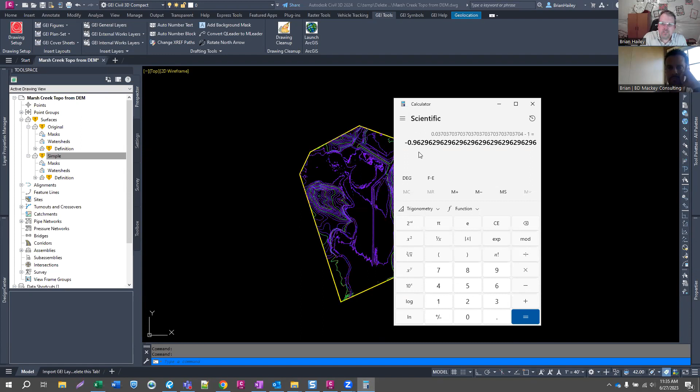So I went into the simplification. If you're not familiar with simplifying a surface, it's an edit. So if you come down to edits, right click on edits, there's an option to simplify the surface. I did the edge contraction, and then I did the entire surface.

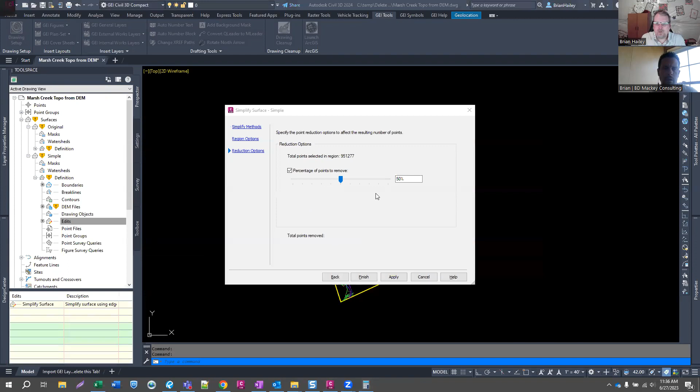And then I took this down to whatever that was, 96% or something like that, right? And I did that, and this new surface, when I go into the statistics, you can see how much faster this goes, is 952,000 points, which is small enough that it doesn't need the MMS file.

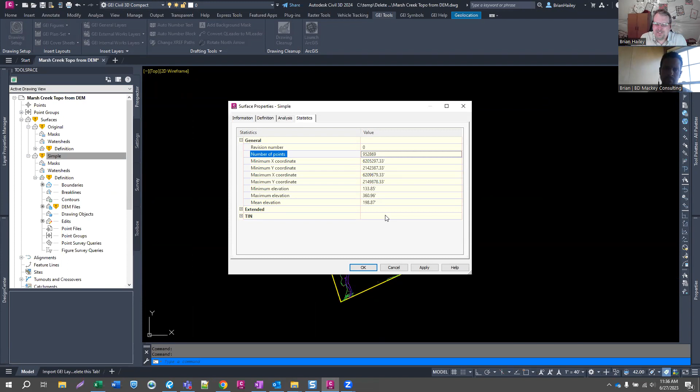I was like, that's great. But how much did we lose on this? And so what I did is I went in and I created a volume surface, and I did a volume calculation between these two surfaces, the original surface and the simplified surface.

Now, I do not recommend creating a volume surface between surfaces this large. In fact, I tried this many times to save it in the drawing, and every time I save it, I open it up, it says, hey, this drawing needs to be recovered. And when I open up the drawing, the volume surface is gone. It just does not like this much data, but it worked while I was in it. And so I did some analysis on this, and here's the information that I got.

All right, so the furthest off it was 1.4 feet in the positive direction and 1 foot in the negative direction, so above and below. And most likely those are way out there on the fringes, because you can see the area was less than a square foot on that. So I'm not worried about those. In fact, if I go within 1/10 of a foot, you can see practically 100% of the surface is within 1/10 of a foot of each other.

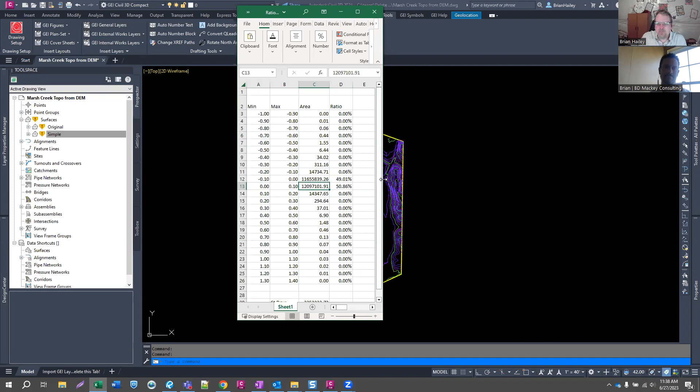So I was like, okay, this gives me a little bit more confidence in what I'm doing, because you add those two together, it works out to be like 99.8% or something like that, which is practically 100%, right? And then I said, okay, but 1/10 of a foot could still be significant. So I went even deeper. I went into 1/10 of a foot accuracy within 1/100th of a foot increments within 5/100ths. And here's what I got.

So as you can see, about 40% of the surface was within 100th of a foot. And almost, what's that, 97% of the surface was within 5/100ths of a foot. And I actually copied this over here, so you can see these are the totals here.

So 99.87% of the surface was within 1/10 of a foot. 97% was within 5/100ths of a foot. 93% was within 4/100ths of a foot. And so I feel pretty confident with this simplifying option, and it just makes the surface workable.

So if you're working with DEM files, my recommendation is to do this yourself, right? Don't take my word for it, because you want to make sure that what you're doing is working. But take this large DEM file that's millions and millions of points, simplify it so it's just below 1,000,000 points. And it's not 1,000,000 points; if you have 999,999, it's still going to write it. It's somewhere just below 1,000,000 points. I don't know what the exact number is.

Then you won't get that MMS file. So if you do it and you still get the MMS file, remove the simplify, do it again with an extra percentage taken out, right? And then you should be good to go. Okay, two follow-up questions to this.

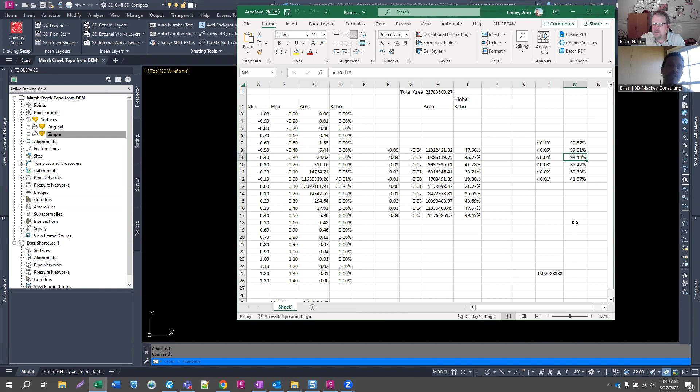John asks, what file format was the DEM in? This was a TIFF. So if I come in here, we'll go to this one. Take a look at the definition here. You can see that this was, let me browse for it, it was a TIFF file, so it was a GeoTIFF. I can't find it right now because I've got mapping issues, but that's beside the point. So yeah, it was just a TIFF file.

I don't know where the TIFF file came from. I was just told, hey, we need a surface from this. And so that's what I did. And I did put in a data clip boundary before I added the TIFF file. That brought it down from like 60 million points down to whatever it was we saw, right? 27 million points.

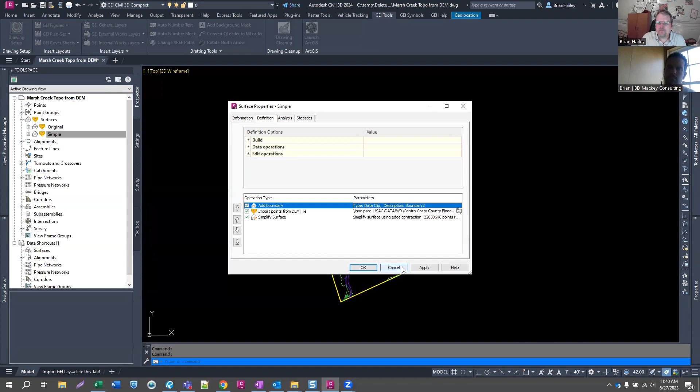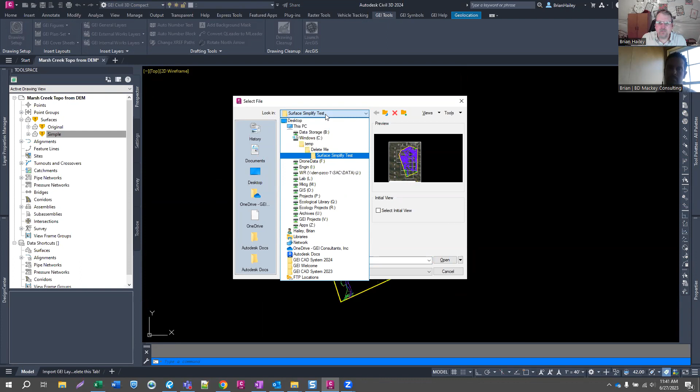We're going to follow it up with, how did you pull a spreadsheet of the data with the surface area ratio? I didn't pull the spreadsheet. I created the spreadsheet. And so let me open up a different drawing, something that I can actually do this with in a decent time. It took me hours to create that spreadsheet just to verify for myself. Let's see.

2024 Civil 3D, Civil Tutorials, Drawings. Let's see what would be a good one. Let's do the corridor one, because I know this has multiple surfaces in it.

So what I did is I created a volume surface, right? So I came up to the Analyze tab. Way to make this go away. Okay, move it. Yeah, there we go.

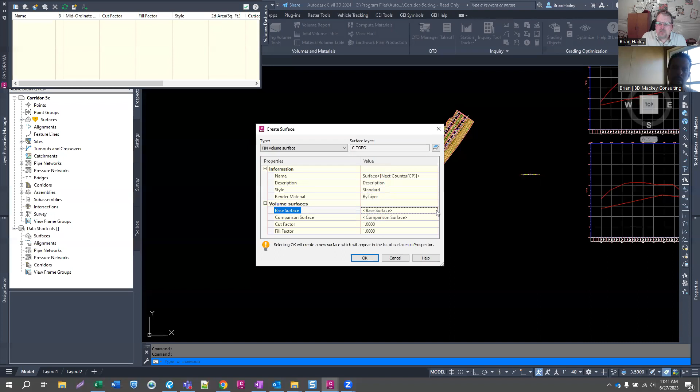All right, so I went over to the Analyze tab, I went to the Volumes dashboard, and I simply created a volume surface. And I used those two surfaces here; which order, in that case, it didn't really matter. But if you're doing volumes, typically you want your existing ground to be the base surface, and then whatever it is you're comparing against to be the comparison surface. So I'll just use a datum surface. Sure, why not?

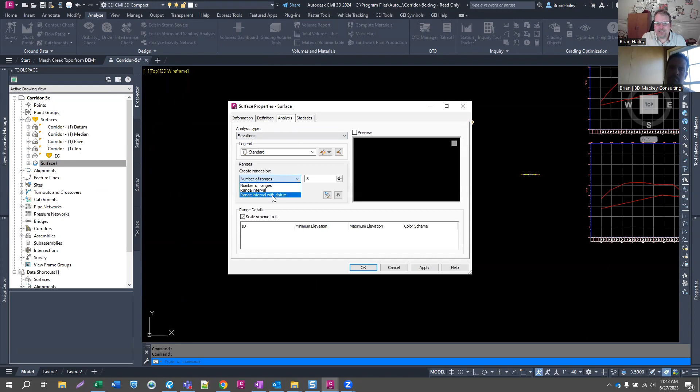And then I went into the surface properties of that volume surface. I went to the Analysis tab, and I did a range interval with datum. I said, hey, I want this to be at 1 foot intervals. I ran the interval, and it shows me. Wow, there's a lot of cut in this project. Let's make this a 5 foot interval. That's a little bit better.

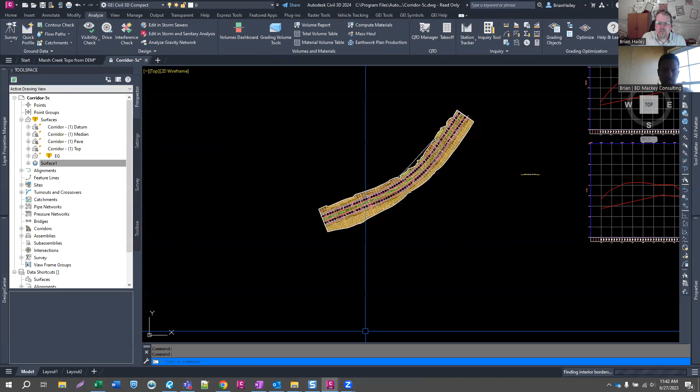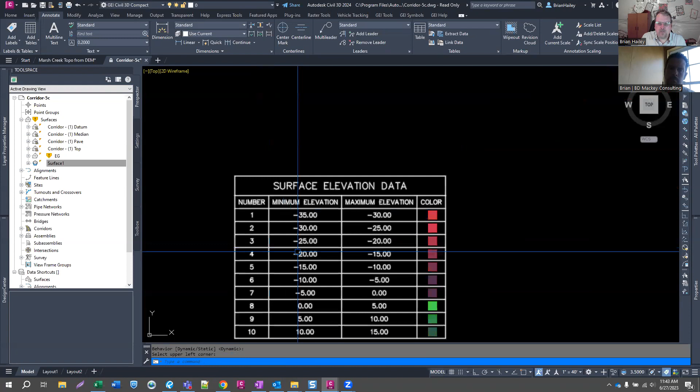And then I created a table. So I went to the Annotate tab, add tables, add surface legend table. I did it for that volume surface. I'm going to do an elevations table. I want it to be dynamic, and I'll just throw it in right there. Now the default table doesn't have area in it, so I just edited the table style. So I'll come down here and edit the table style.

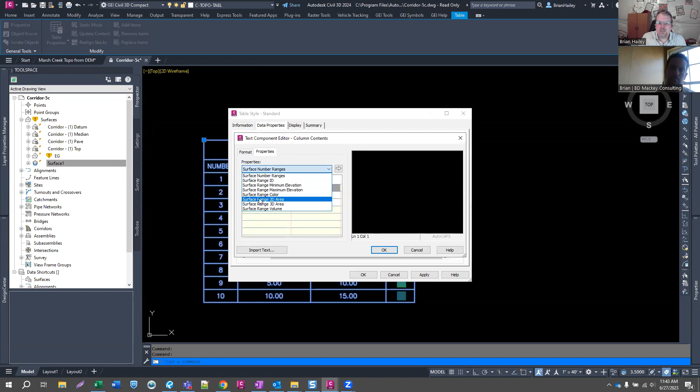On the data properties, these are the columns that are currently in the table. So I just added a new column to it. Gave it a header. In fact, I didn't even bother giving it a header, but you probably want to, maybe this would be area square feet. And then down here, if you double click in here, that's the data that's going to go into the column. And one of the options is the surface range 2D area. So I just added that in. And then okay. And then those are the areas for those ranges.

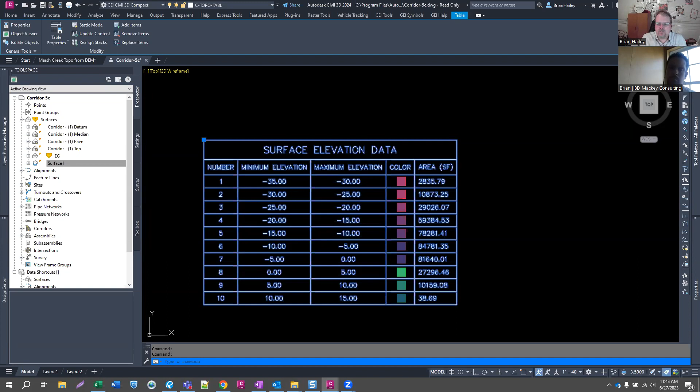And so using this sort of thing, this is how I got those areas out. And then I just manually copied this data into my Excel spreadsheet. Here's what I found. So there's no way to export that data to an Excel spreadsheet? Not that I'm aware of.

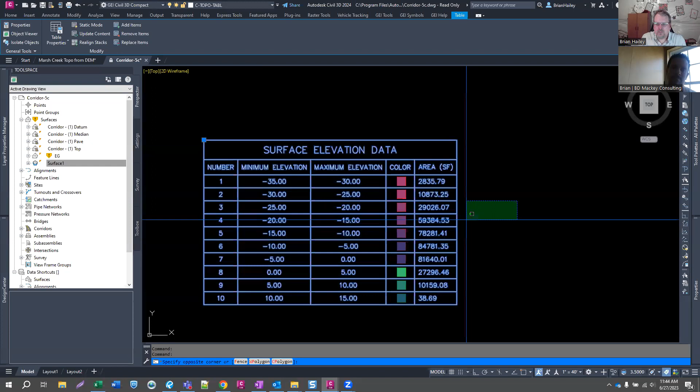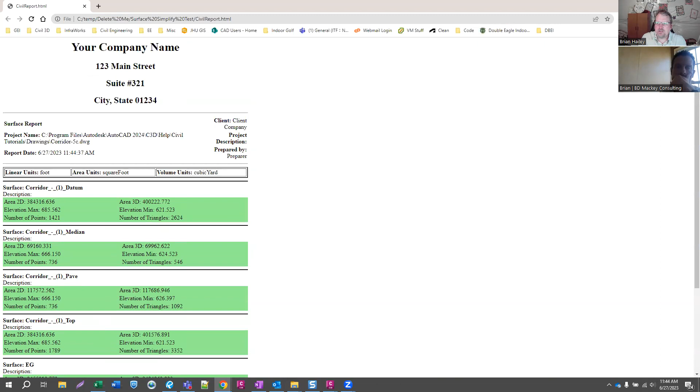There might be an option under... Okay, why'd you go away? It's auto saving. If I go to the Toolbox, Reports Manager, surface report, this might do it, but I don't think it will. Let's find out. Sure. It was giving you an HTML. Yeah. It is. Nope. Doesn't give you the breakdowns. Like I said, I don't think there's a way to do it. Yeah, out of the box at least. There might be a program that will do it.

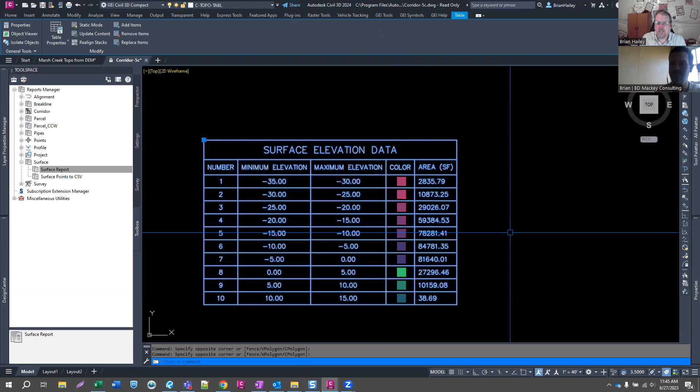So as he doesn't think there's a way to do it, Brandon asked, does table export work? That's where my brain was going, to some of the AutoCAD tools, just export tables. Oh, this is an AutoCAD table. Oh, I know. As far as I know, there's no export a Civil 3D table to Excel. That'd be really freaking nice though. I don't know why that's not an option.

Autodesk.wishlist.com. Right. I don't know what that actually is. Don't quote me on that page.

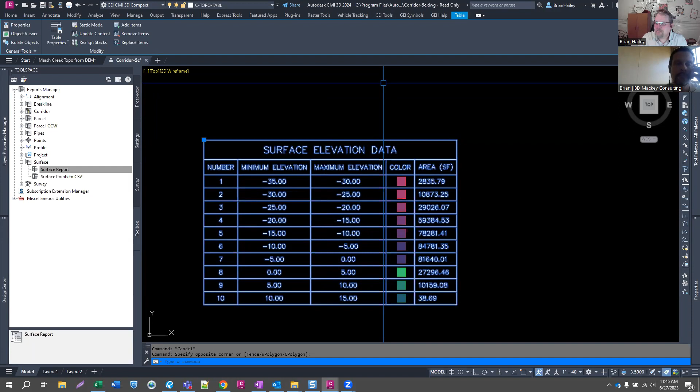And then Brian S also says he's been creating a Dynamo script to do this range interval with datum, and then uses assign colors to it. Oh, nice. Yeah, I would not try to run that on this because, for example, if I go into the surface properties here for this volume surface, I was actually doing it by number of ranges, and I was kind of manually doing this for a bit because just to click in this cell took like 5 minutes. Why? No clue. Super annoying, but just to be able to edit it took 5 minutes. So annoying.

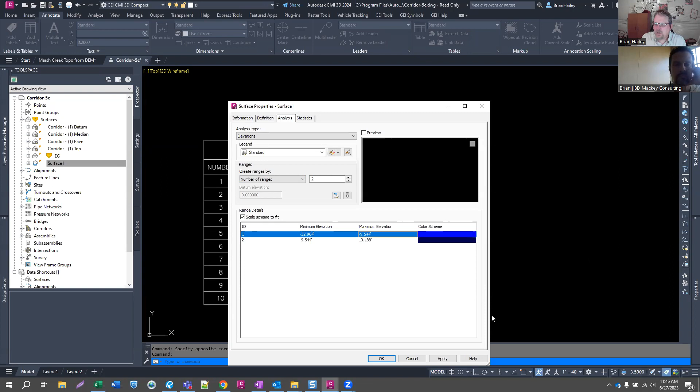And in the chat, people are saying, does Project Explorer tables export work? Ooh. Project Explorer tables export. I don't know. Carlos says, yep. Carlos says, yeep. I use it often.

I'm assuming Carlos has an accent, 'cause he types with one.

Where would I find the table in Project Explorer?

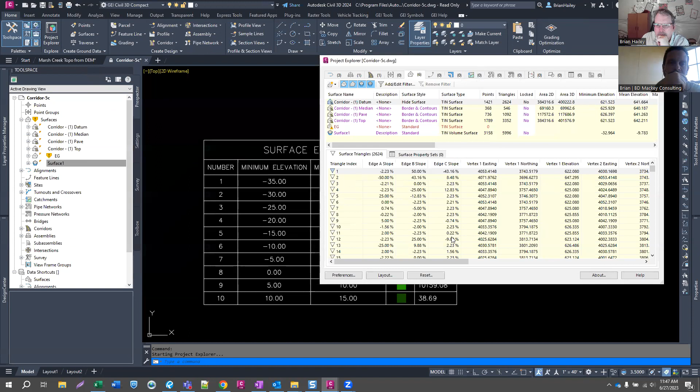I have no idea where to find the tables in Project Explorer. I mean, I have this table, but I don't care about that data. I want to get the elevation analysis table out. Anybody have any idea how to do that? Well, I think Carlos might have been saying he uses the app that Brian S put in the chat.

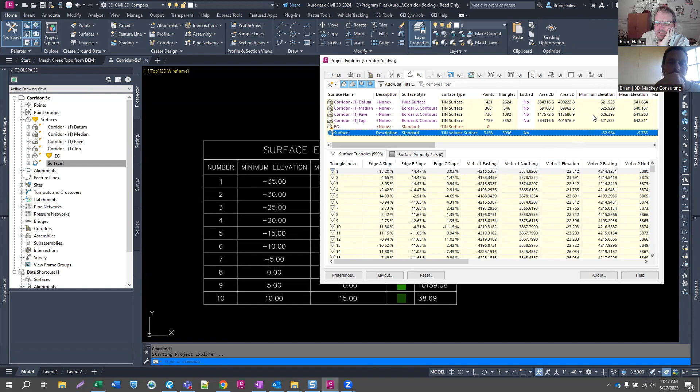No, there's no way to do it there, but there's an app to export your Civil 3D tables. Gotcha. Here's the app. Download that app. Take a look at the app. So Don Mayo says there is something in the wish list. It's been there for years, but nothing's happened. You're right.

There you go. How much is this? It's free. Check it out. Cool. Had you known this a week ago, you would have saved 2 hours on your project. No, not this project, because all the time was spent changing the data. Putting that data into Excel took a minute.

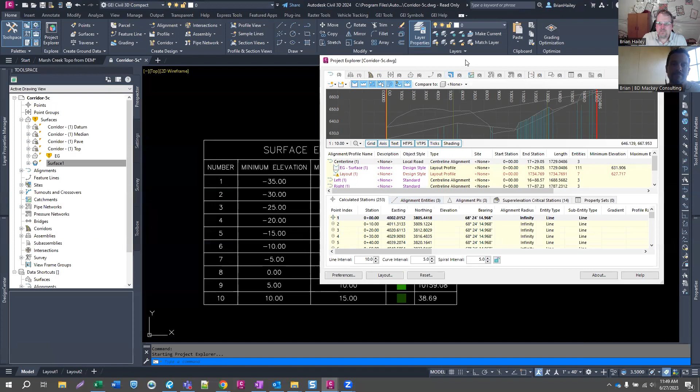Rebecca suggested in the chat that if you create a surface property set in PE, then you can create a report that you can export. Right, but will that display the elevations? I don't know of a way to get that elevation information into property sets. Yeah, Brian's agreeing with me. I don't think there's a way to do it. I would love to be shown to be wrong.

I love finding out that I'm wrong. So if I'm ever wrong, just call me on it, please. Because if I find out that I'm wrong, then I can stop being wrong. And that's kind of my goal in life. I'm gonna take that snippet of this recording and send it to your wife, so she can prove you wrong at any point in time. And also your children.

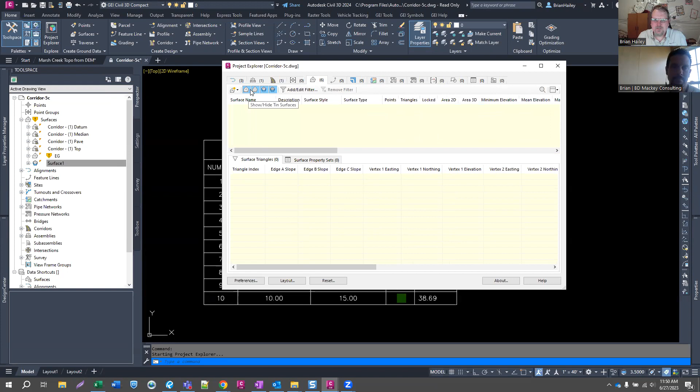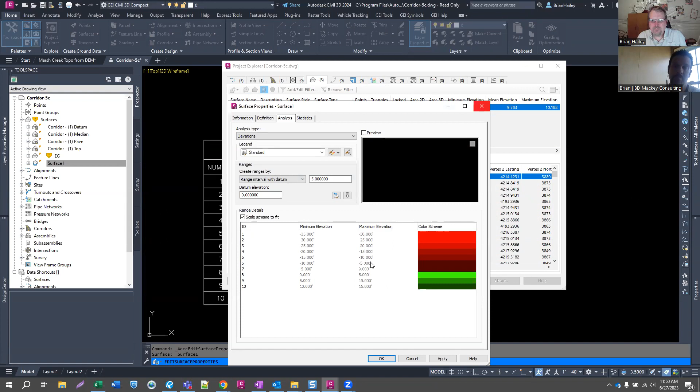Rick is also saying that in the Project Explorer, you can compare two surfaces. I just don't know if that gives you the elevations. Compare two surfaces? How do you compare two surfaces? All right, Rick, you commented, we're putting you on the spot. There's my volume surface. See, it's this that I want to export out. It's down here, with the area. So.

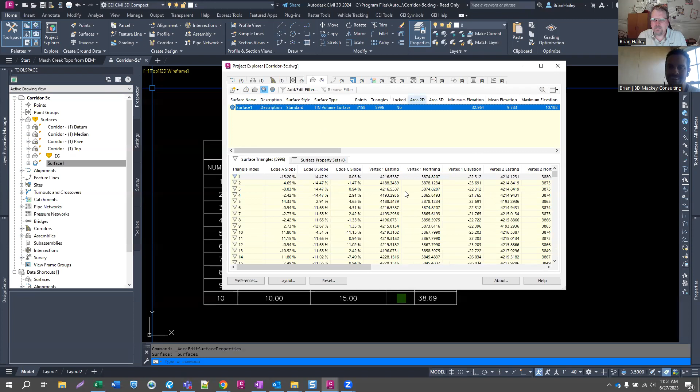Yeah, Project Explorer is great. Definitely recommend it. I don't use it enough because it's new and I'm old. But yeah, it's there. You definitely should be using this. All right. Have we beat that horse to death yet? Everybody said, yeah, you can get points on the surface, but they're not sure about the area or the comparison. Okay. And 2 new questions came up during that process.

So Sean asks, I am using Civil 3D 2021. When I have several CAD drawings open, there is a delay or lag time when I make a command. The command shows up in one of the open drawings that I didn't intend to use. I have to get out of the drawing, come back to it again. It's really irritating. Is this a bug in the 2021 version?

I don't know. The only time I've ever seen a lag in Civil 3D is if you have your properties open. Don Mayo is saying, yes, it is a bug, all the time. Okay. So I'm assuming John has seen this as well.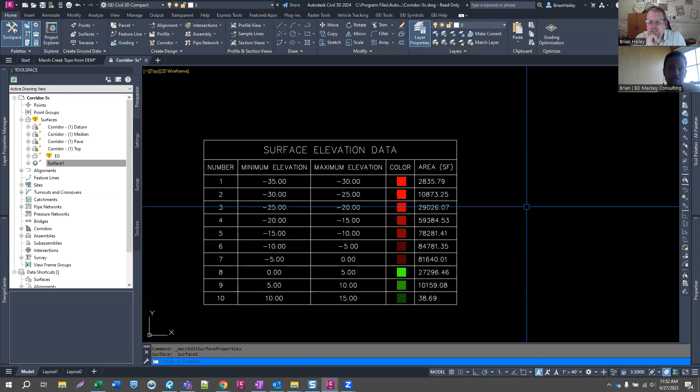And Chris says turning off the level of detail can help with the command line issue. I'll have to pay attention to see if it happens with the level of detail on. So if you're not familiar with level of detail,

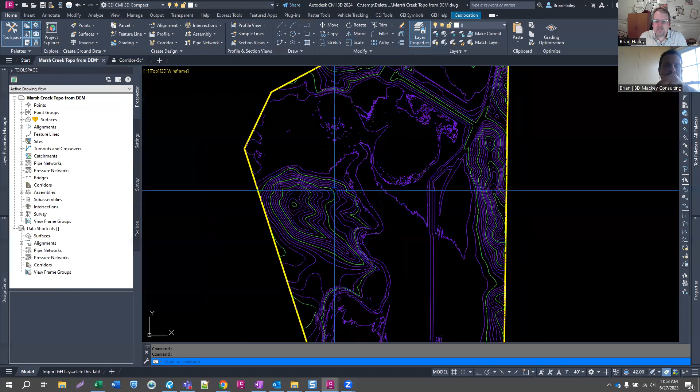so actually, I did want to show this. So I've got, this is one of the surfaces. I think this is the original surface. But I went in and I extracted the major contours from the other surface just to compare them. And so if I zoom in here, you can see this red line. That's just a polyline, right? And then you can see how close it is to my contour. So it's really ridiculously close.

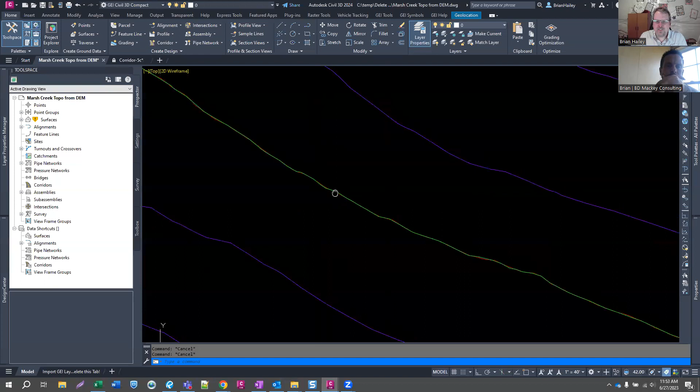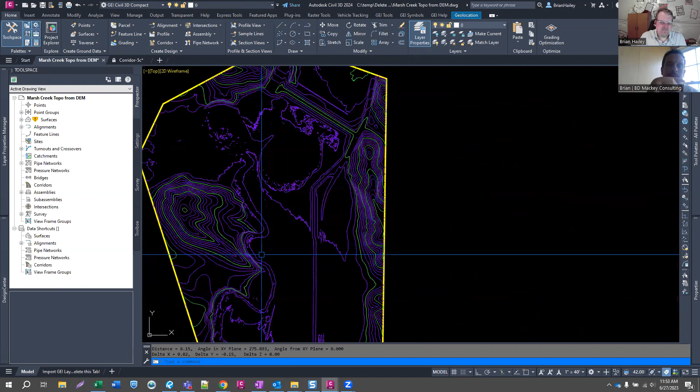So I would have absolutely no problem using this simplified surface for design instead of the original surface. As you can see, what is that distance there? It's less than 0.2 of a foot off. It's not like I'm using this to redesign an outlet structure for a pond, right?

If I was doing that, then yeah, maybe it would be important. But this is a stream restoration project. I've got this stream running through here, and we're going to be doing some bank stabilization on it. There's no need for that huge surface for this kind of problem.

By the time you actually go through all the jurisdictional corrections and all the people protesting, you're working on a stream, it's going to be 4 years later when the project happens, it will have eroded that far by then anyway. Yeah, that's another valid point. This stream is morphologically changing all the time.

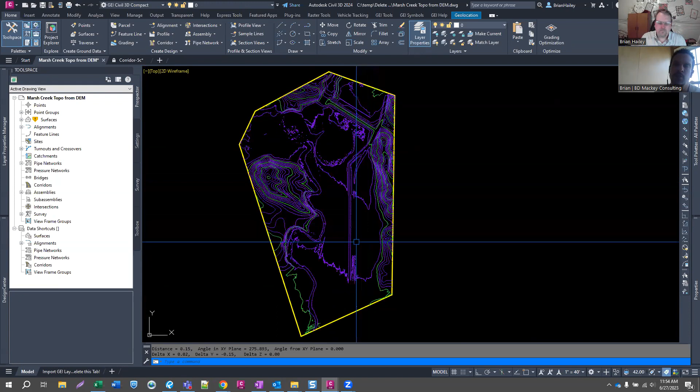So to answer Sean's question, is that a bug in 21? Sounds like it is. People said yes, it is, but then Danny had a follow up: it is still a bug in 23.2. So it's not just a problem in 21, Sean. Danny was saying he still sees it in 23.2. But I was going to come back to that level of detail.

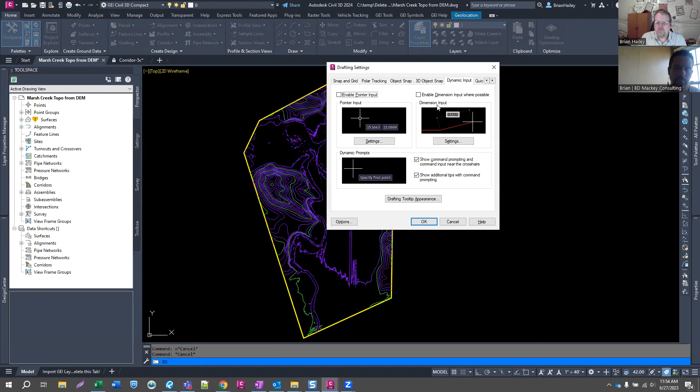So if I turn level of detail on, I just type level of detail. So this is 2024, I'm actually just in the process of setting up 2024. Currently my enable dimensions were turned off, and my dynamic input is turned off. Why is my dynamic input turned off? Come on. Pointer input. There we go. Okay, so level of detail.

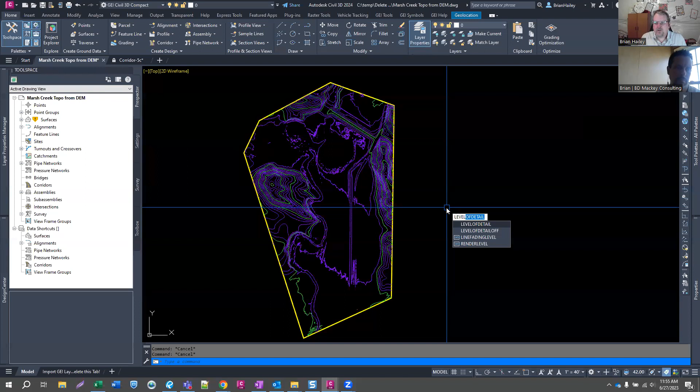All right, so I'm going to turn level of detail on. Basically what that does is it says, hey, I'm not going to display everything. And this one's actually not doing anything. But it'll only show you what you need for the surface. Maybe it's because this is a simple surface. I'm currently displaying 10 and 50 contours. So if I change this to say 1 and 5 contours here.

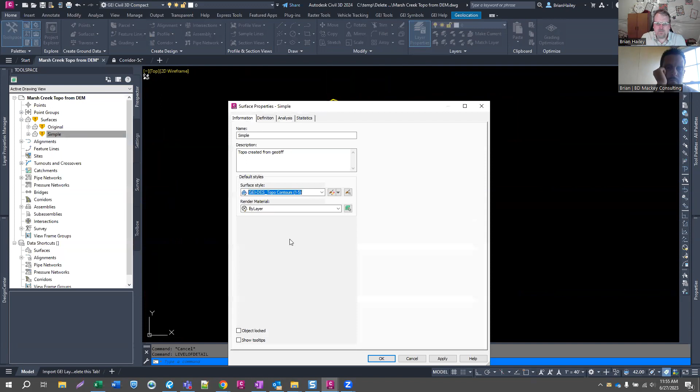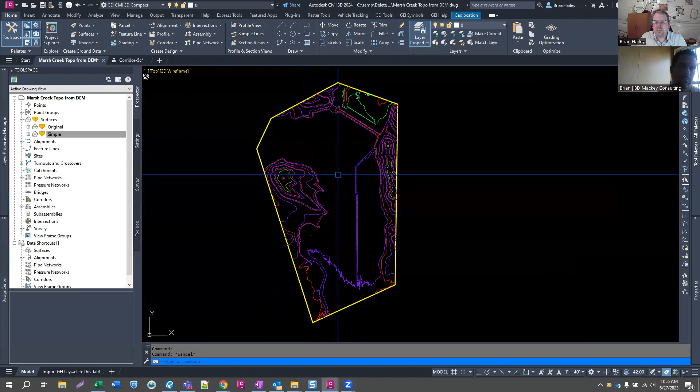You can see as I zoom in, I get more detail. As I zoom out, I see fewer contours. So that's level of detail. That's what they were referring to when somebody said maybe the level of detail was turned on that was causing that. You'll know that the level of detail is on in your drawing if you see this little symbol up here in the top left of your drawing area. That little symbol is your way to know that the level of detail is on.

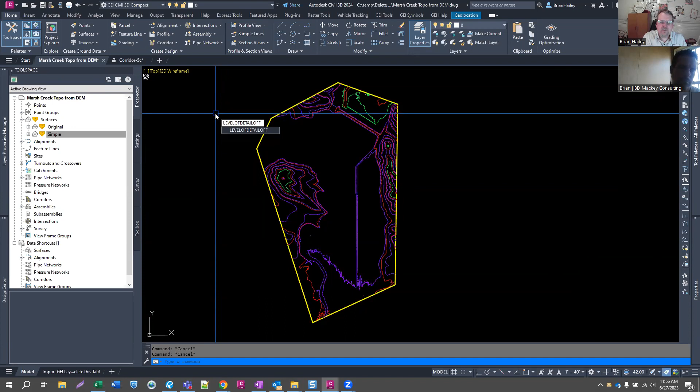Now, why this symbol is being used and how you would know that that's what it is, I have no clue, but that's what it is. So level of detail off is the command to turn it off. Now I'll just do a regen, and there we go, back to displaying all the contours. Okay, cool. What else have we got?

Brian S said, since you're in 2024, you should put the enable multi-thread, I'm assuming this is a system variable, set to on. Enable DS multi-thread. There it is. You missed a B. Enable, there we go. Simultaneous multi-thread, I'm guessing is what that is.

So let's see, turn F1 on there for that, see what this is, and it's nothing. All right, to control whether multi-thread is enabled while setting the working folder for the data shortcuts, fix the issue. Okay, cool. So there we go.

And then Tom was going back to the export thing. He said that you can go back to your volume surface analysis tab, select all and copy paste into Excel. Yeah, but that doesn't give me my areas. Just telling you what Tom said.

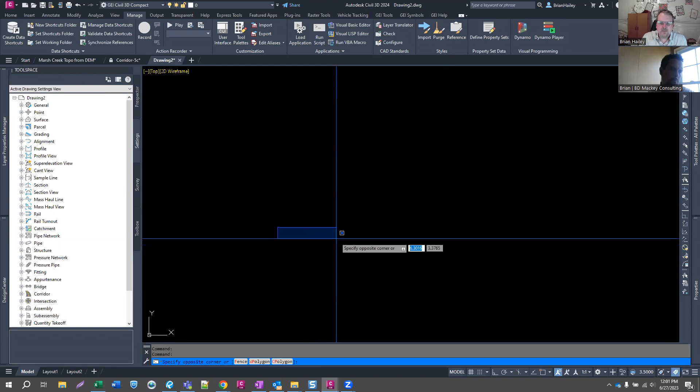Now that template is referenced in, if I come over to surface styles, you can see I get all those styles from the template. The nice thing about doing it this way is if you need to make a change to one of these styles for the project, rather than going into each drawing and changing it, you can change it once here in the reference template, and that will propagate through all of your drawings.

Just like changing an XREF propagates through all the drawings it's referenced in, changing the template will change all the drawings it's referenced into as well - but this is more for styles, settings, layers, etc. Now if I want to make a change to one of these, I'll right click and choose edit, and say I want to see the border for this one. I'll hit OK.

It's going to say wait - you're trying to edit a style that came from a reference template, what do you want to do? There are three options. One, I'm just going to cancel out of this.

Two, I'm going to make a local copy - oops, I didn't mean to click on it, I'll turn that one off. I can make a local copy of the style with a unique name, and that's what I accidentally clicked on, so you can see it created a local copy of it.

Or I can apply the edits for this drawing session only - I just want to see it temporarily, and once I close the drawing and reopen it, it's going to go back to the way it was in the reference template. So that's the idea behind reference templates.

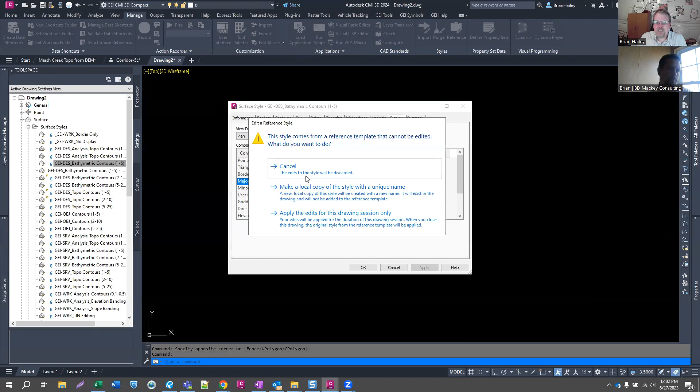If I then go in and detach that reference template, I don't remember what happens to the styles - I think they all get promoted. So let's detach that reference template.

And refresh this... did I not delete it? Is it not going away?

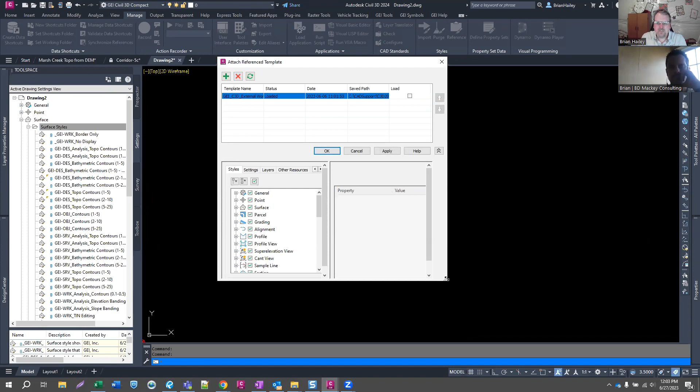Oh, there's the OK button. I was hitting the X instead of hitting OK. That was my bad, I was looking for it at the very bottom instead of in the middle. You can see all those styles go away except for the ones currently being used, and those were used because of settings brought in from the reference template.

So that's kind of the way reference templates work. How would you go about setting one up? I don't think there's really anything to do.

I would not set up a reference template for the company. I would not say every drawing is going to reference the company reference template. I think that's a bad idea, because CAD standards are never set in stone, things are constantly changed. If this particular setting in this style really sucks and I want to change it, that's going to change for every drawing that's out there. If somebody's in the middle of publishing a sheet set when I make that change, it could affect things, and I don't like that idea.

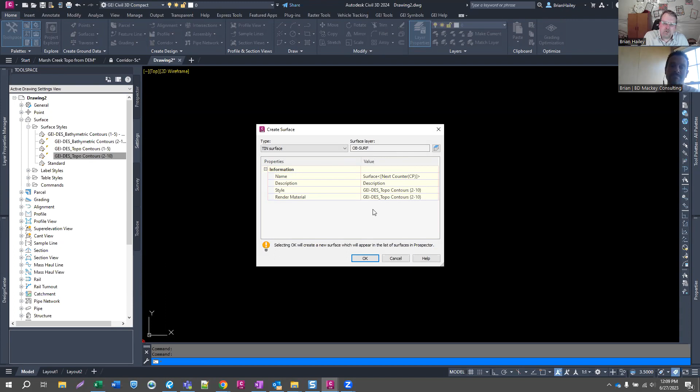So for example, let me do that. If I go create a surface, the default style is this style here, and so that style is being used by the settings. So it's non-purgeable, which is just what drives us crazy, because that style...

But you don't then want it as a Civil 3D drawing, you want an AutoCAD drawing. So we should be exporting these out to AutoCAD and then purging the snot out of that drawing instead of purging the Civil 3D drawing. Agreed.

Then Chris brought up a comment saying for our civil projects, we place the current template in a standards folder for that project and use that template to create all new drawings for that project. Reference templates are an alternate workflow which are attached per project if desired.

Cool. And then the problem with having a template per project is it makes it so that I can't use the quick new options. If I come up here and just hit this plus, it's going to start a new drawing using the default template. And if that template is different than the project template, then I have to be aware of that sort of thing. So I can't set this button up to create a template based, I suppose.

Well, I was just looking at this, so maybe y'all have an idea of what this is, because I never really paid attention to this. What is this project files search path? Perhaps that could help with that.

This is for missing XREFs, but I have no idea when it would be used on a project. From what I understand is for, hey, we have multiple people working on this drawing and their drives are mapped differently, or something along those lines, but I don't know.

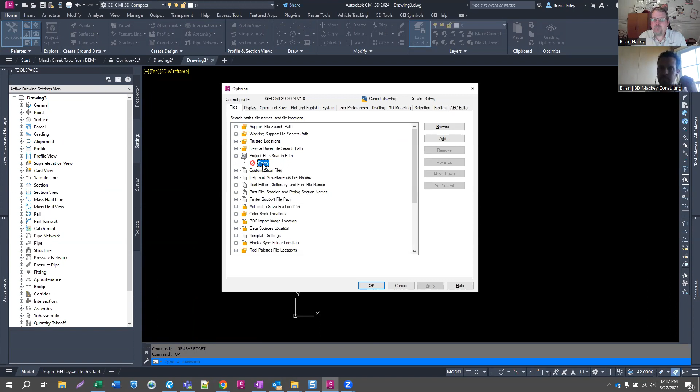Right, so that's back to this project search path. From what I understand, you would add a project. So I would call this one, I don't know, Brian. I've never actually done this, this is the first time I've ever done this. And then you could add paths and browse to someplace. And then in the drawing itself, you could do project name, I think is what it was, and then you would call this one Brian.

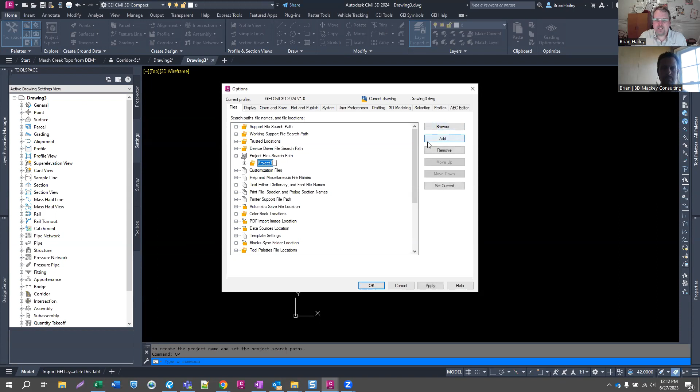And then it would look for that Brian, and I canceled out of that. I should have left that in there. All right, under the project name. All right, so add Brian. And then it would look in the paths that I add underneath Brian for the XREFs for the Brian project. And that's my understanding of how it works. But like I said, I haven't played around with it. As a company-wide CAD manager, I don't see me setting this for a project at all. I think this would have to be very project specific. So.

Yeah, it looks clunky, Brian. Just use relative paths for your XREFs. Just use relative path. Is this old or is this new? Because I've never actually noticed this before. And I think maybe I've just kind of glanced over it all the time. It's been there a while. Yeah, a long while. Yeah. I just have never paid any attention to it till just today. So.

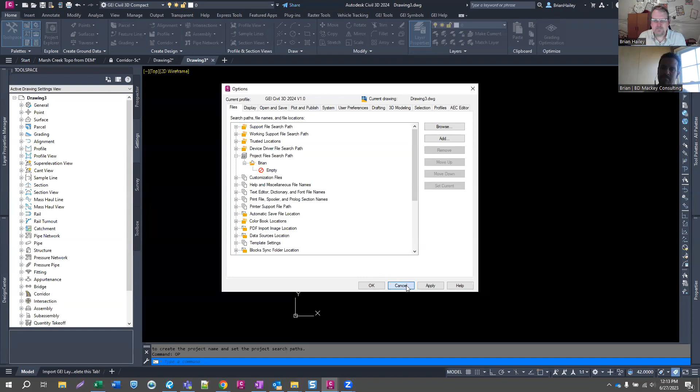All right, we got anything else, Brian? Question from Joel here. It says, have you done anything with InfoDrainage and moving data back and forth from Civil 3D? Yeah, I don't have any of the new stuff that came over with the acquisition of whatever that company was. I can't think of it off the top of my head, where InfoDrainage comes from. I don't have any of that software, so no, I haven't done anything with that yet. So I have nothing to add on that particular topic, unfortunately. I'd love to get into it, but I just don't have access to it. My understanding is it's fairly pricey. Innovyze. Thank you, Justin. Innovyze is the company I was thinking of. But I haven't looked into it yet. So

Yeah, John, my understanding is you still have to pay for the Innovyze tools. Autodesk has to make some money off of their $1 billion acquisition. It was only $1 billion. That's my understanding. What do you mean, John? It'll go nowhere. Come on, they've done so much with like the Storm and Sanitary Analysis and the Hydraflow. Okay, never mind. You're probably right. Yeah. Sorry, Joel. No answer for you on that one. Yeah, sorry about that.

Brian's like, hey, let's all get together and start a next gen stormwater analysis company, then let Autodesk buy us. So I was looking at the Hydraflow stuff, and that was purchased from a guy whose first name was Chris, I think. I don't remember what his last name was. Autodesk bought that software from him, and I was looking at it, like, it'd be really nice if they updated this, and are there options out there? So I went out there and I was looking, and that same guy basically redeveloped that same program, but with updates, better than what Autodesk has. Funny. Oh, that's funny. Sometimes that stuff amazes me.

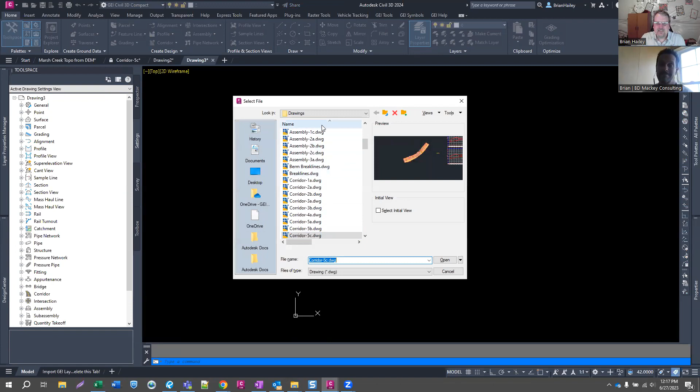Yeah, I can do that. Let's see. We'll open up all these drawings here. They're all read only, so it's going to have to ask me for each one. These are just a bunch of the tutorial drawings. So they're not big drawings, but I can open up a lot of them.

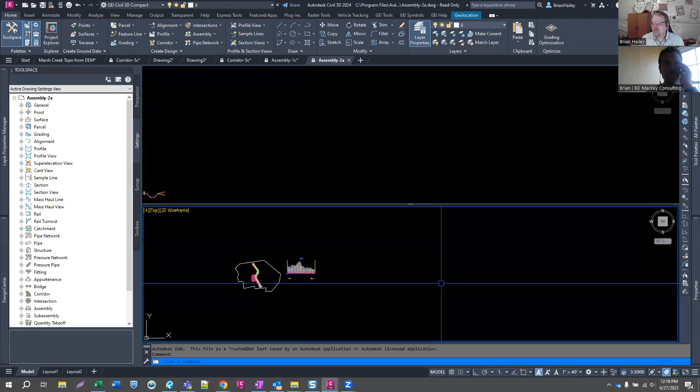Sure to play with the level of detail while testing as well. That's true. That's true. And level of detail is a system setting, not a drawing setting, if I remember correctly. I hope so, because otherwise that's a lot of drawings you've got to turn this on.

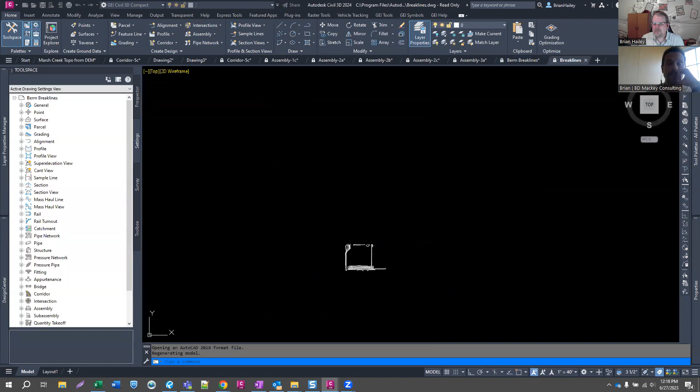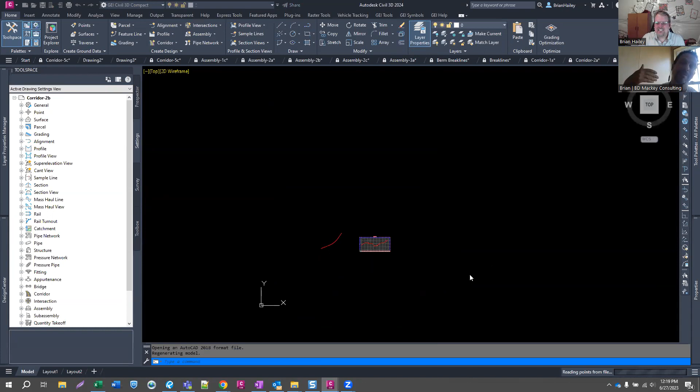See, I just want to point out that if more questions had been asked, we don't have to sit here and wait for 5 minutes and watch Brian open up an excessive amount of drawings. We could be actually answering real questions. No offense, Sean, but I did save this to be the last comment, even though it did come up a long time ago. Yeah, I shouldn't have opened that many. That's okay. We have no questions, so this is perfect.

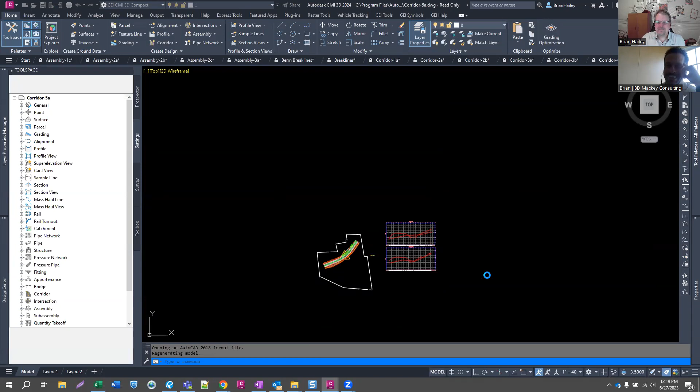So how's the weather down there in Holden Beach? It was crazy, like rain and wind last night. Like there was over an inch of rain in like an hour. Wow. Blew everything all over the place.

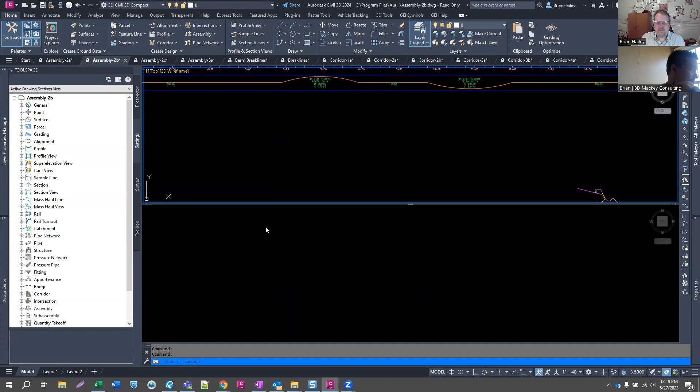Went crazy. Yeah, I'm not seeing any delay switching between these. And Tom says it's quite likely a command didn't quite finish before people switched drawings. All right, so can you turn on the level of detail, and can you do some sort of long command and then try switching drawings while it's still trying to process that command? That's what Tom thinks it is.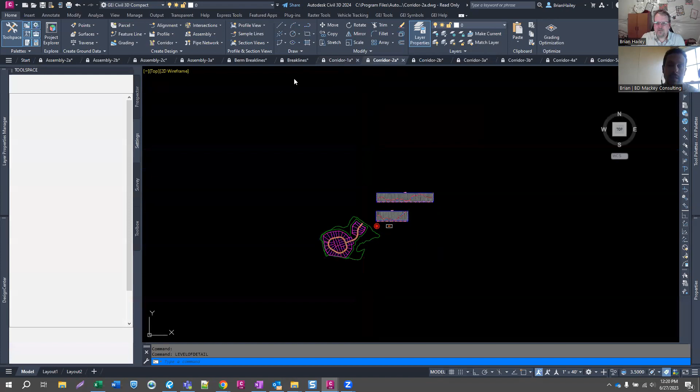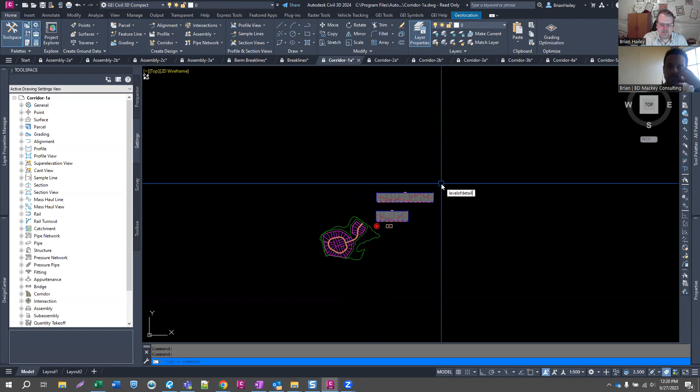I'm not seeing anything. I don't know if I'm doing this right. I'm just using Control Tab to switch between drawings now, and things seem to be fairly okay. Level of detail off. I'm not noticing any appreciable difference between having level of detail on or off. So yeah, I don't know. Yeah, Brian, it could have been a large surface in there. So we tried. Now I have to close all of these.

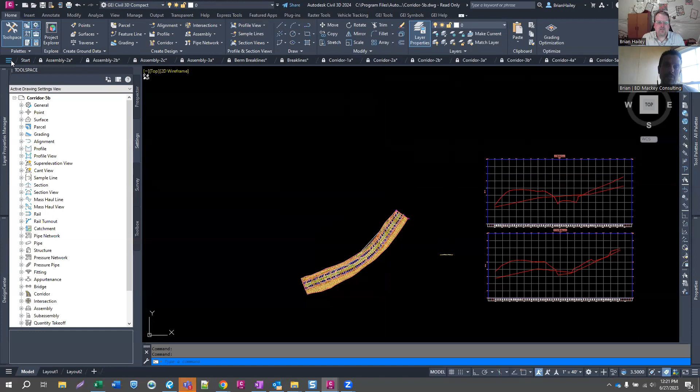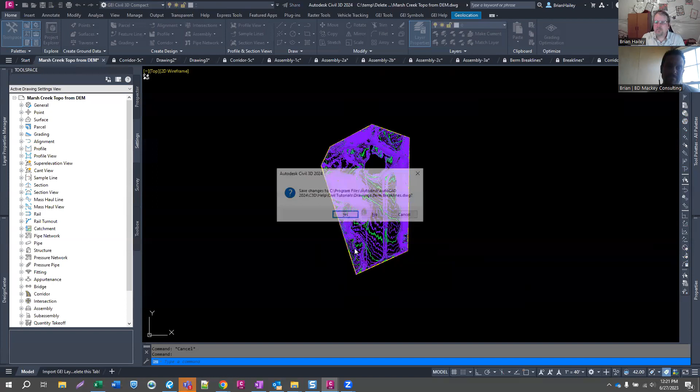Okay, let me give you a tip. So if I want to close all the other drawings, I can actually right click on a drawing file tab up here at the top, and I can close all other drawings. And then I just have to hit no a lot. And the nice thing about this is it asks me for each one before it starts closing them. So it doesn't close it and then go to the next one and then ask me. So I can get rid of all the prompts right here at the beginning, and then it goes through and closes them all. So close all other. Great command.

In the command line prompt, which is just close all. Yeah, close all works as well. I think that you can do close all other as well. Yeah. It's there on the command line. Everything's in the command line practically. That's funny, as a Revit user, there are times I'm like, God, I wish I could just type this command in, because I know what it's called, but I forget where the stupid button is. Yeah.

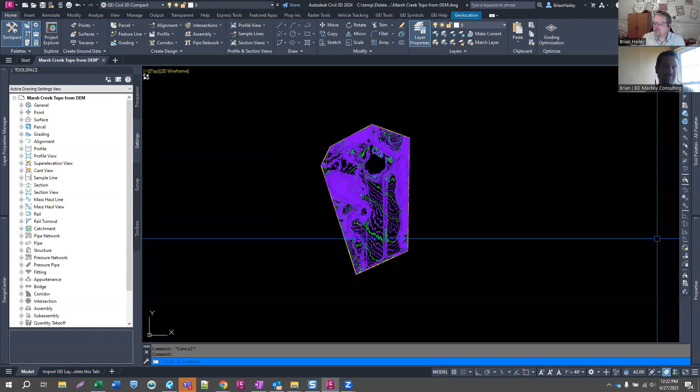Well, on that note, our audience was lacking, so I guess we're gonna finish 8 minutes early. All right. Wow, we had quite a few folks and just that few questions. People must be picking up this Civil 3D stuff pretty good then. Or they're just all thinking towards next week when they get to have a day off. Then maybe that's it. All right.